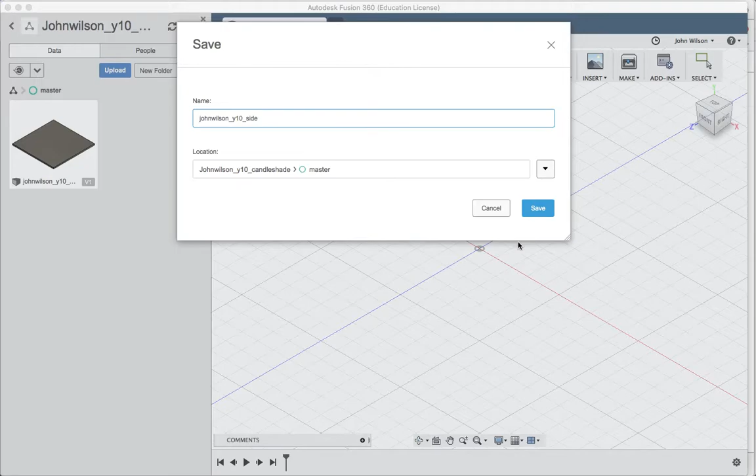Check where you're saving. Yeah, so I'm going into my John Wilson Year 10 candle shade folder and saving there. Okay, so there you go. This time, straight away, a thumbnail appears there. It's going to be a blank thumbnail because, of course, I haven't drawn anything.

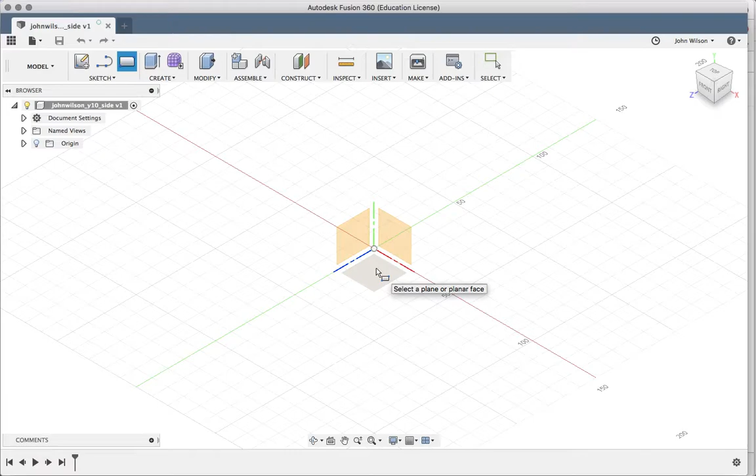So I'm going to close my data panel again, just to maximize the space. I'm going to press R on my keyboard. And this time, I want to draw either on the front or the side plane, okay, not the plan view. I want the front or the side plane. If I draw down here, I can always turn things around later, but it's not really helpful for what I'm trying to do now. So I'm going to click on this one.

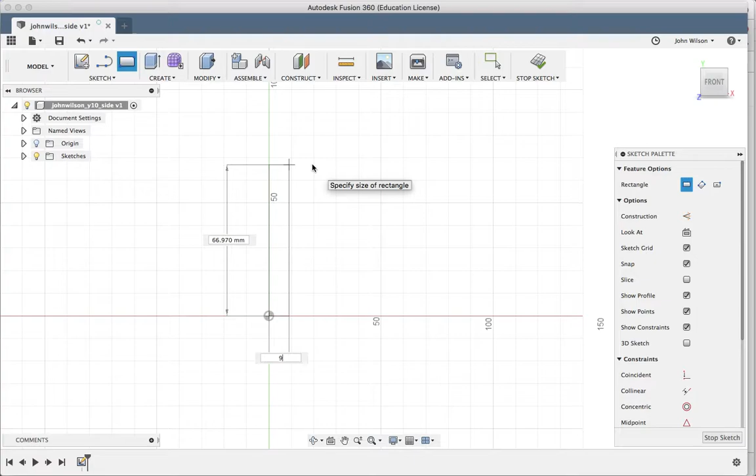I'm going to take the rectangle tool again, and I'm going to pull out a rectangle. And this time, I want the width to be 9, because that's how thick our plywood is. This is our piece of plywood. And press Tab, and I want the height to be 60, because that's how high we have made that piece there. Okay, you press enter and there you go.

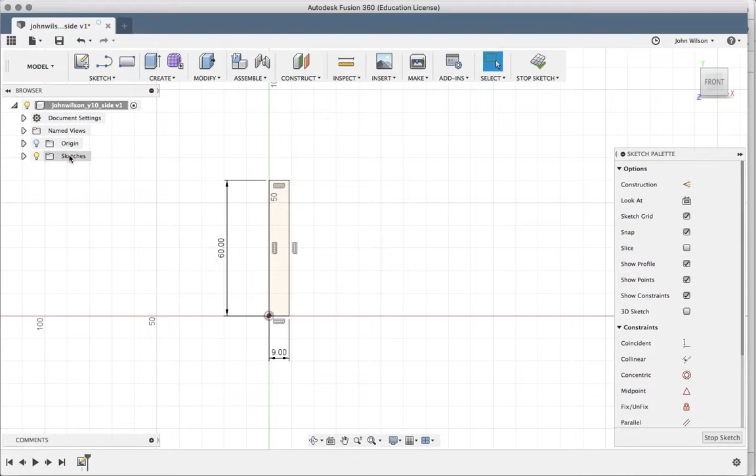You'll notice that it fills a sort of peach colour, and that tells you it's a completed sketch. If there's a break anywhere in here, then it won't fill and it won't be able to extrude to go from a sketch into a body. Remember, so we've just created that sketch.

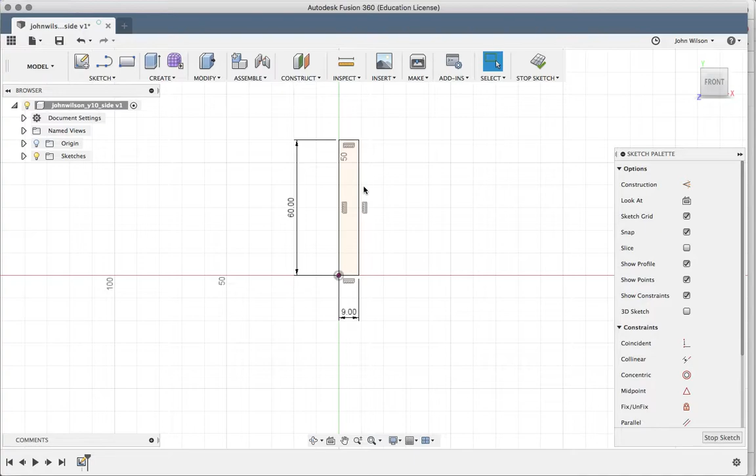If I undo that for a moment, you'll see we're back to no sketch here. So I choose my R for rectangle tool, I choose that front, I click in the center of the origin there, and I'm going 9, tab, 60, press enter. Okay. Now, I'm going to zoom up because the next little bit I'm going to need fairly close eyes on things.

For this, we're going to draw a line. So L for line tool, and the line tool is pretty self-explanatory. You click where you want the line to go, and then you press enter or escape when you want to detach things. All right.

Now, I don't want those 3 lines, so I'm going to delete those using my undo key. Your undo key is your friend. Try and use it, okay, if you need to. Things go wrong, just go back to the point before they went wrong. That's the easiest way of doing it.

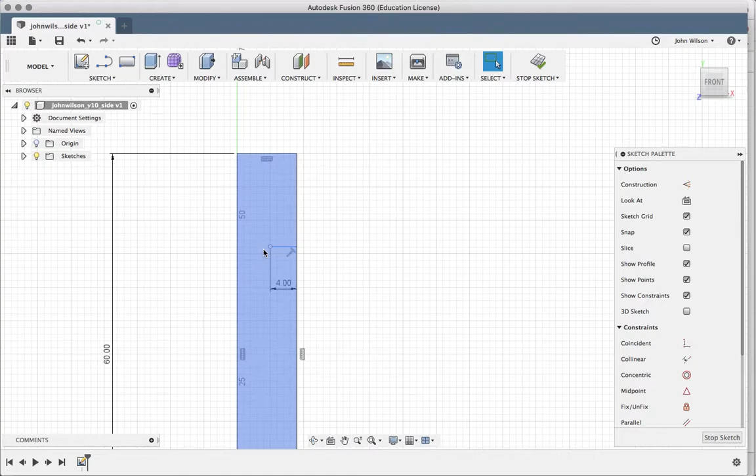I'm going to press L for line, and I'm going to draw a line starting, it doesn't really matter too much where, if I'm down here or up here, because we're going to do that very accurately in a second. I just want to draw a line that comes out by 4 millimeters, so it sticks into the piece of work by 4. There you go. You'll notice that it's put a dimension line on there for me, and that's also known as a constraint, which means when I do other stuff, that 4 is going to stay the same.

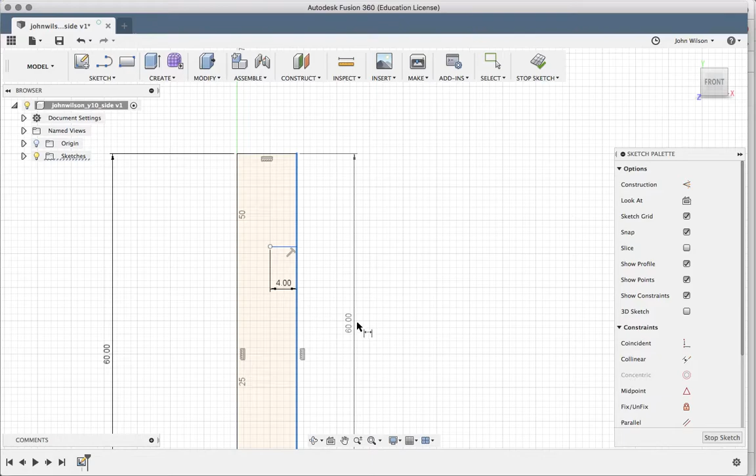So I want to check the distance between here and where I've just drawn the line, so the top corner and where I've drawn the line. And the way I do that is I press D on the keyboard, D for dimension, and I could pull out a dimension line for that whole side, which is 60, but I already know it's 60 because it tells me over here. And if I put a 60 on this side, well, I just don't need to. So I'm going to escape from that.

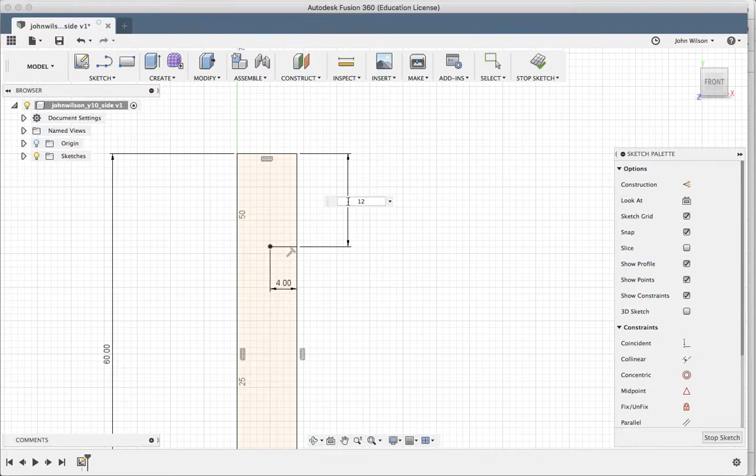What I can also do is press D and go from one point to another point and pull that out. That's telling me it's 13.9. So I'm going to click once and change that to 12, because the distance wants to be 12. As soon as I press enter, that little 4 millimeter line is going to jump upwards a few spaces. There you go. So we now know it sticks in 4 millimeters and it's 12 down from the top, which is exactly what we want.

We're then going to use the line tool, and what I'd suggest you do is zoom in at this point so you can see things nice and clearly.

I want to pick up the end of that line, and you need to be a bit careful here because some of these are lines on the drawing, which is that one, and some of them are dimension lines, such as that one and this one, and this one here is a dimension line.

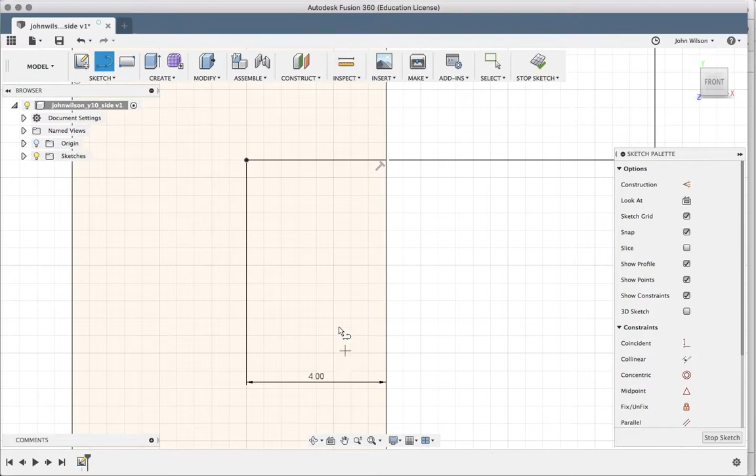So there's my corner, and I'm coming down just 3 millimeters, so I can type in 3 and press enter, or you could just click to put another point in, and then we come across here and click to finish that off.

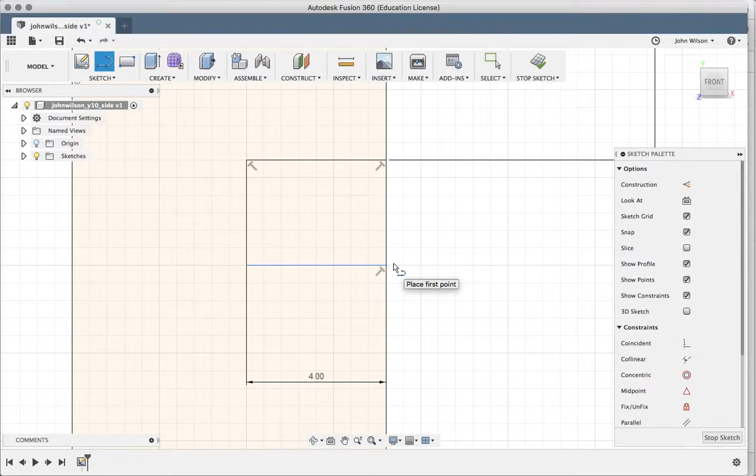At that point, we've now got a big rectangle with a smaller rectangle inside it. We're going to press the T key on the keyboard, T for trim, and we're going to trim that away.

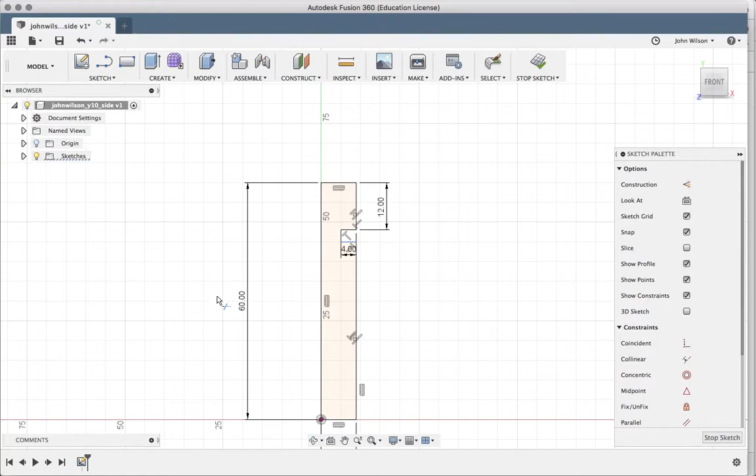And now we've got a notch, and if you think back to your piece of wood, you had a notch that was running all the way along it. Now, at the moment, we've only got a sketch here, remember? So if I start to orbit that and look at it in another way, it's only paper thin.

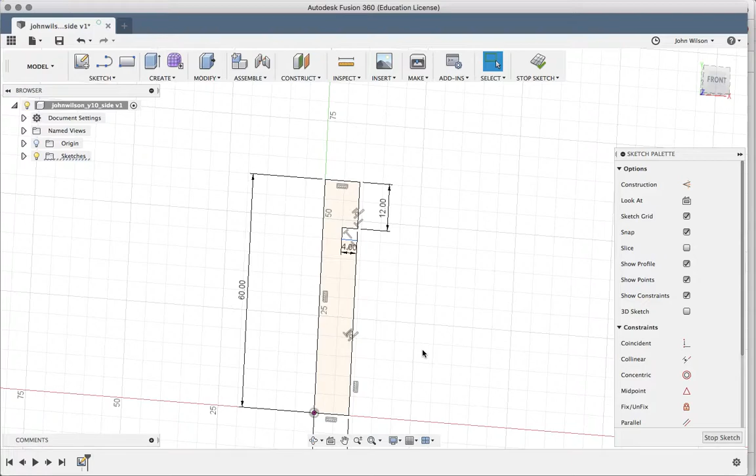And so my command is going to be exactly the same as on the last one. By the way, escape - when you're using one tool and you want to stop using it, you just press your escape button and you go back to nothing selected. Now I'm going to press E for extrude, the same as we did on our piece of plywood, and I'm going to type in a length of 120.

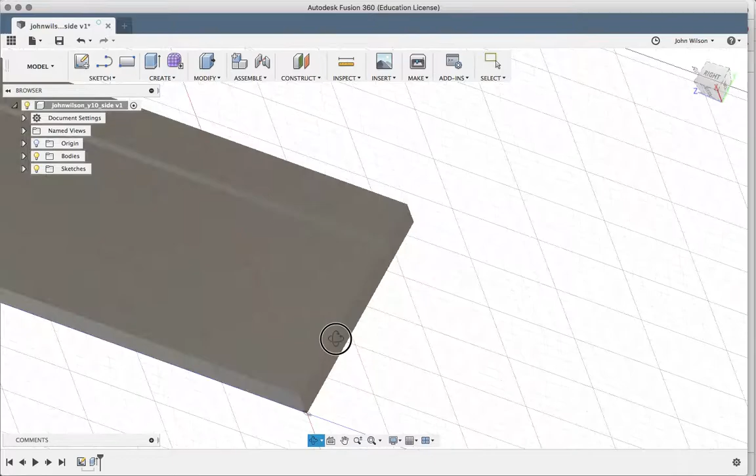And what I've now got is a piece of what looks like actual physical material. It's got 3 dimensions to it. It's got a groove running all the way along it. And you'll notice up on my browser, I've now got a body, which is body number 1, this one here.

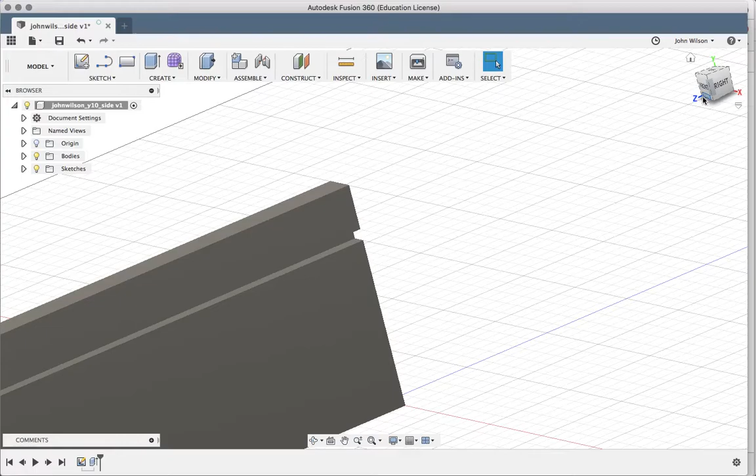Up in this corner, we've also got the option to view from different angles, so I can click on a certain thing, I can rotate in various directions. Using this tool here, I can hold it and physically move it around, as an alternative to my orbit tool, or I can click the home button and it's going to put it in like so for me, in a 3D view. So there's our side.

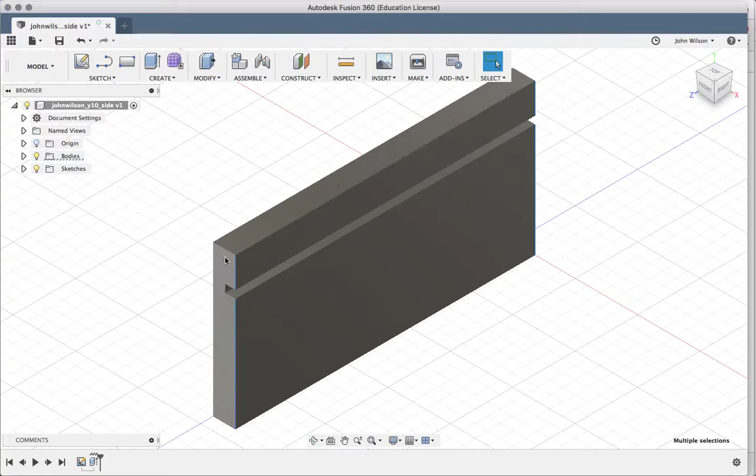Now, the only thing you'll notice is that on our side, we had an angle cut on the inside. So we're just going to add that to our work. What we're going to need to do is first of all select where the angle should be, which is on that edge, and hold your shift key down while you select a second edge, third edge, fourth edge. If you don't hold the shift key, then every time you select one, it's going to deselect the previous one.

And then we're going to go modify and chamfer, and the chamfer is going to be 9 because it's the same as the thickness of the piece of wood. And then we click OK.

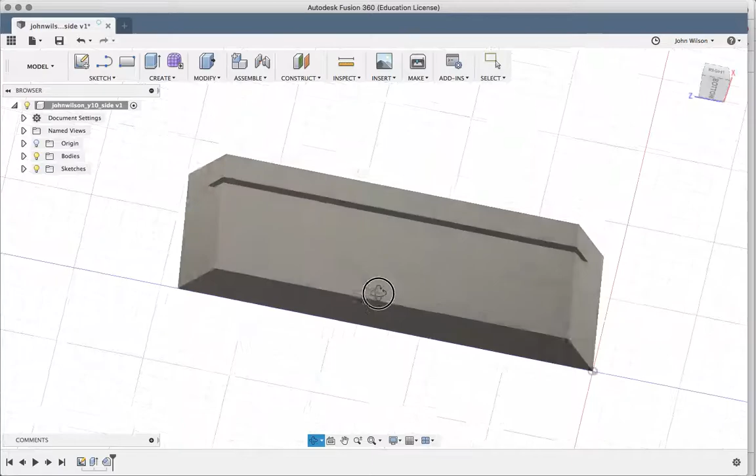And there we have something - it doesn't look like a piece of wood at the moment, but it certainly looks like the shape of your side piece. So there's my home button again, just click that and click save so we don't lose that, and click OK so we don't lose that.

And we've then got in our data bar here all of both of our pieces of work that we've done. So next thing we're going to do is assemble those and make them actually look like the material we've been using.